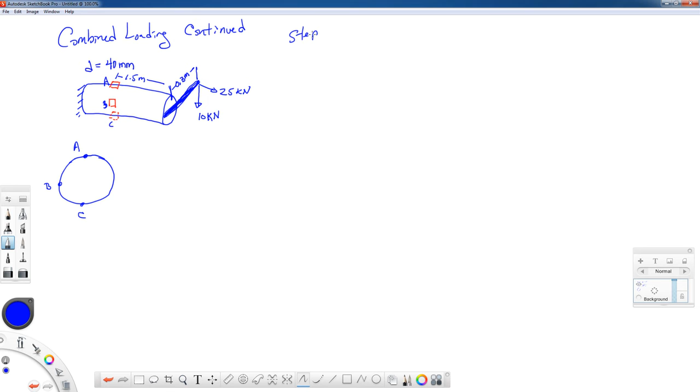So although we could make a free body cut at point A and find the reactions directly, what I would suggest, if you have anything like an overhanging arm or the geometry looks a little bit complicated, is to simplify that first. And what we need to do is to resolve those forces to the centroid of the cross section of the bar that we're looking at.

So in this particular problem, let me redraw the bar that we've got. I think I can do a little bit better job than that. Let me try that again.

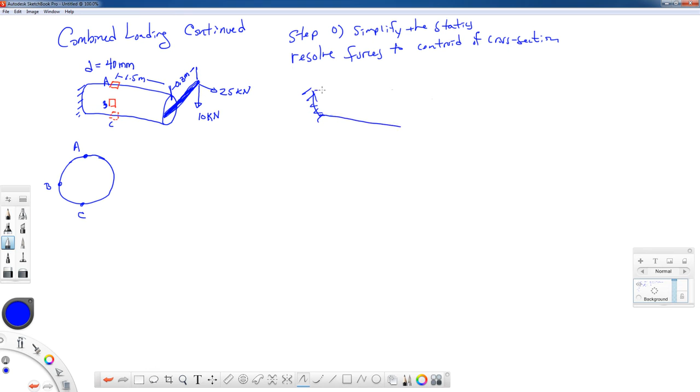We have this 25 kilonewton load at 0.3 meters from the centroid. So this is trying to show that this is located at the centroid. So we're going to replace that force with an equivalent force and moment. Now the force will be in the axial direction at the centroid, and it's still 25 kilonewtons. But we're also going to have a bending moment that goes on the front of this bar, kind of from left to right. And that bending moment, I'll call that M1, is going to be 25 kilonewtons times 0.3 meters.

Now we have to deal with the 10 kilonewton force. It will also come over as a force and a moment. Anytime you move a force, it moves as a force and a moment. In this case, it moves as a torque, which is a special kind of moment, if you want to think of it that way. And the torque in the front will come around this way. So I will call that torque T. See, it's pulling down this way. It's going to cause a torque that goes that way. And that torque T will be 10 kilonewtons times the 0.3 meters.

So that first step is always to simplify the problem. And now this looks a lot like the other kinds of problems that we've worked in the past. All right, let's now take a cut at our points of interest, which are 1.5 meters from the free end.

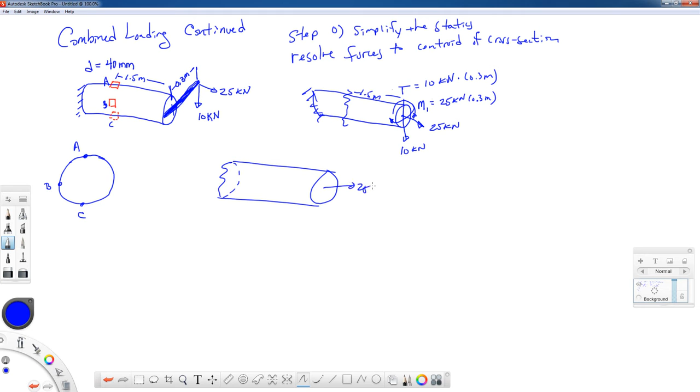We have an axial force going out of 25 kilonewtons. We have an axial force that goes this way, 25 kilonewtons, to keep that at equilibrium. We have a torque that comes around this way in the front. I'll call that T. We know the value of it. So we have to have an equal and opposite torque, T, on the backside. We have a bending moment that goes left to right. That's my M1. We have to have an equal and opposite bending moment that goes that way. That's my M1. We have a 10 kilonewton force that comes down. We have to have a 10 kilonewton force that goes up.

And in addition to that 10 kilonewtons, as we move further down to get to 1.5 meters, we're also going to have another bending moment that puts the top in tension and the bottom in compression. So it's going to go top to bottom, and I'll call that M2. Now sometimes these things can be kind of hard to draw and visualize. It takes a little practice, and be careful as you look at my picture. It might be a little bit confusing too, but try to see where these moments are coming from. So that M2 would be 10 kilonewtons times the 1.5 meters.

Alright, so we have 3 points. Let's just do them all at once. Here's the top view of A, here's the side view of B, and here would be looking through the section like a top view of C. Alright, so we're going to go through each of these reactions and see how they cause stress at those particular points.

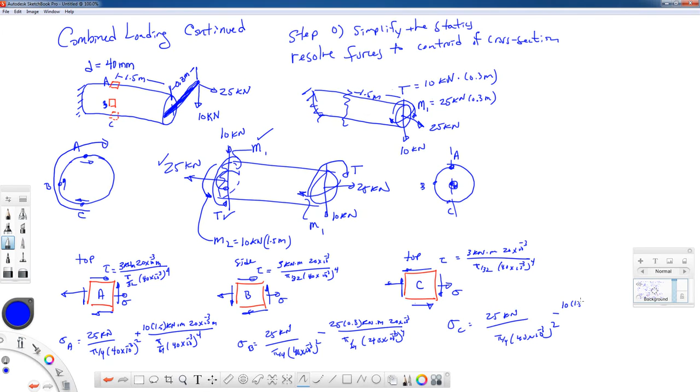Now point C has the exact same stress, except it's in compression from the bending moment. So now at point C, we're going to subtract away that bending stress term. 10 times 1.5 kilonewton meters, times 20 times 10 to the minus 3 for the radius, the diameter over 2, divided by the bending moment of inertia, pi over 64, diameter to the 4th power. So that takes care of M2.

And the last thing that we want to look at then is the transverse shearing force. It goes down in the front. Let's draw another cross section. The formula for that is VQ over IT, where Q is the first moment of area that we're going to shade in from the point of interest to either the top or the bottom of the cross section.

And at point A we have no Q area, and at point C we have no Q area. So we don't get any shearing stress at points A or C from the 10 kilonewton force. We will get some shearing stress at B. The area that we shade in will be the top half. That shearing stress goes down on the right side of point B, so I'm going to subtract off, and I'm going to write this here as VQ over IT, and let's go over here to fill that in with the numbers.

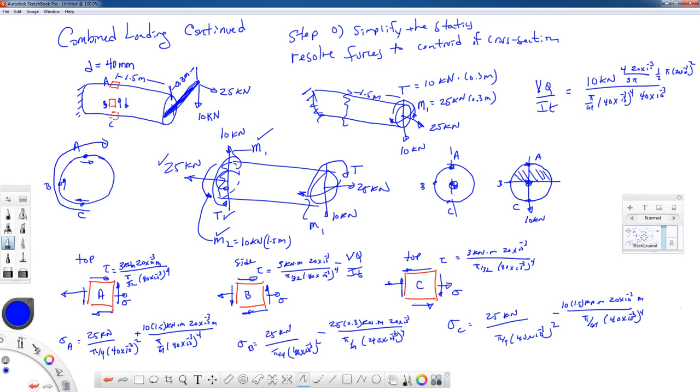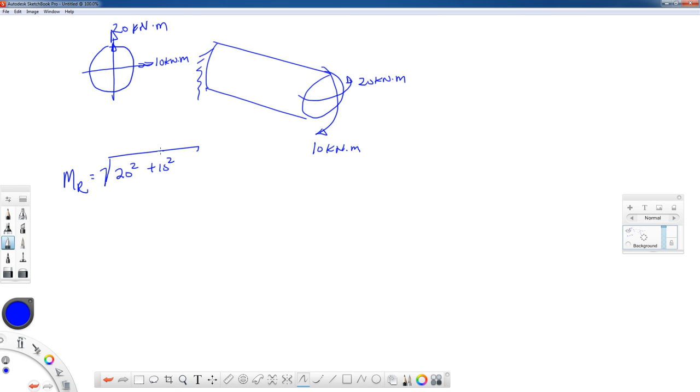The other one, 10 kilonewton meters, bends top to bottom. Using the right-hand rule, I can figure out which direction that double-headed arrow points. That would be a double-headed arrow that would point to the right. Now, if I wanted the resultant moment, that would be the square root of the sum of the squares. Let's see what we get for that. That'd be 22.4 kilonewton meters.

If we wanted to find out where on the cross section had the most tension or compression, we can construct a vector diagram, where this is 10 kilonewton meters here. Let's move it over here just a little bit. And we can call this angle theta. So the tangent of theta would be equal to 20 over 10. Let's see what that would be. 63.4 degrees.

So on the cross section, at an angle of 63.4 degrees would be either my maximum tension or my maximum compression, and 180 degrees from that would be the opposite, maximum compression or maximum tension. Now we can figure out which one is which by looking at these diagrams. So let's see. Something looks a little bit off to me on this one, because I would suspect that the maximum compression should be down here somewhere.

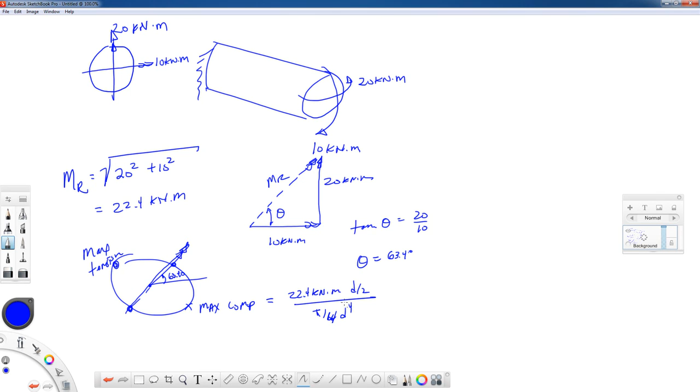Well, this will be the resultant, so that's true. So the resultant moment would go this way, and if we use our right-hand rule, the maximum compression would be here, and then over here would be the maximum tension. Okay. So the math is right. You just have to be careful about how you interpret that double-headed arrow. All right, so then if we wanted to find the stress here, that would be equal to M, the resultant moment, times y, the diameter over 2, divided by the moment of inertia, pi over 64 times diameter to the 4th power.

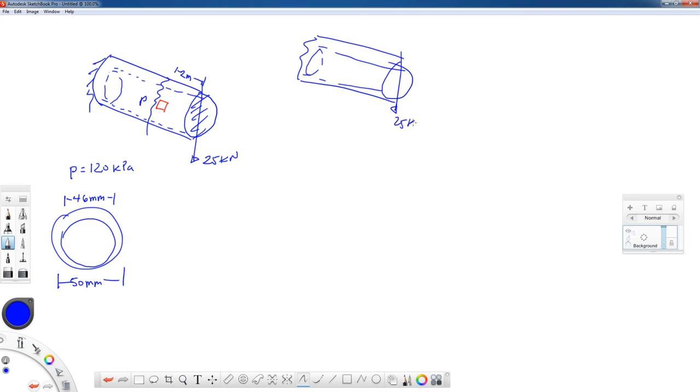Alright, so let's do another example. Here's a cantilevered pressure vessel. It's got a force on the end of it. We'll do the same things that we need to do. We're going to cut this at our point of interest. Draw our free body diagram. If we have 25 kilonewtons coming down, we have to have 25 kilonewtons coming up. And we're going to have a bending moment equal to 25 kilonewtons times 2 meters. Our point A is on the side of our bar right here. And we want to see how these reactions contribute to the stress at point A.

First of all, we'll have our pressure vessel stresses. The axial stress is the smaller of the two pressure vessel stresses. It's equal to the internal pressure times the inside radius divided by 2 times the wall thickness. Now let's see. The total difference would be 4 millimeters, so the wall thickness would be 2 millimeters. And the hoop stress goes around the circumference. That would be the larger of the two, PR over T. Again, we need to use the inside radius, and then the thickness would be 2 times 10 to the minus 3 again.

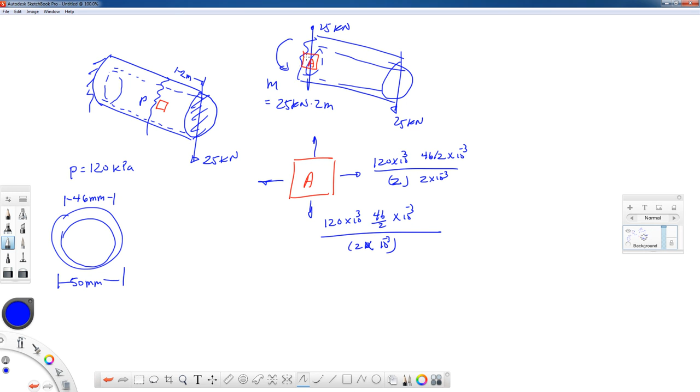We're going to have a bending moment. It puts the top in tension and the bottom in compression. It does not affect point A. So we're done with that one. We will have a transverse shearing stress. Let's draw the cross section over here.

Here's my point A. What I'm going to do is I'm going to shade in from my point of interest to the top of the cross section. And here we have this thin ring. What we need to do is we need to find Q for that thin ring. We're going to apply the formula tau is equal to VQ over IT.

That shearing stress will go down on the right side because the force goes down on the right side. These other arrows get penciled in for equilibrium. Let's call this one sigma x. We'll call this one sigma y. And the shearing stress tau xy will be equal to the VQ over IT term. Let's fill in some of these terms. So V is going to be 25 kilonewtons. We'll talk about Q in a moment.

I is going to be pi over 64 times outside diameter to the 4th power minus the inside diameter to the 4th power, divided by the thickness of the cross section. Now, the thickness of the cross section is going to be this dimension plus this dimension. The thickness, the T in VQ over IT, is a different T than in the pressure vessel T. It's the total thickness of the cross section.

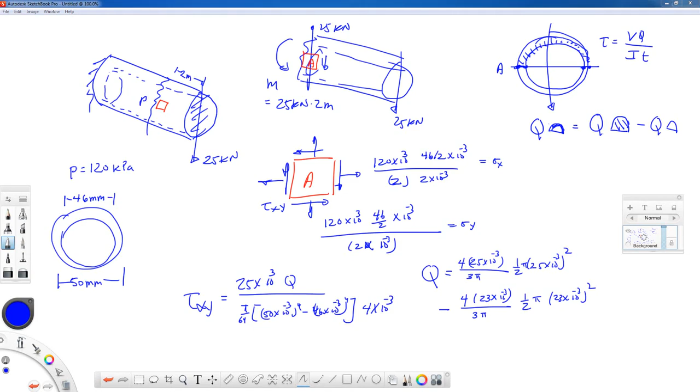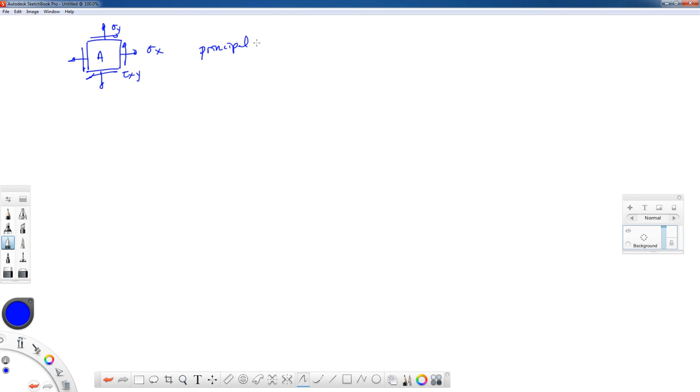So I'm leaving this as symbols, but suppose we've calculated sigma x, sigma y, and tau xy for our problem. If we want to find the principal stresses, we can use Mohr's circle. We can go through our whole process where we plot sigma and positive tau. We got maybe our sigma x and our tau xy point right here. That'd be our x point. Maybe this point is our y point, which would be sigma y comma minus tau xy. We draw our circle. We find our radius. And sigma p1 and 2 would be equal to the average plus and minus the radius.

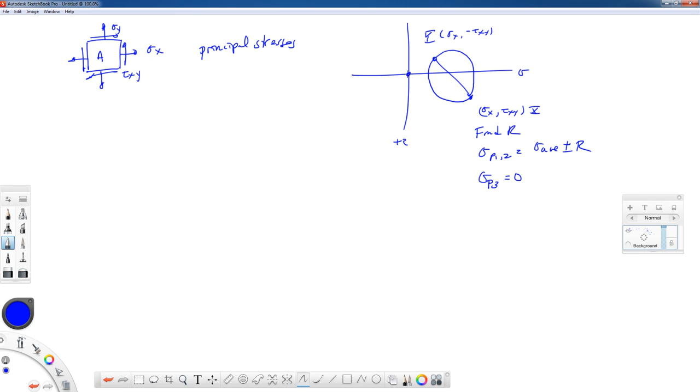Now, in the previous problem, we had a pressure vessel which created what's called a biaxial state of stress on the surface of our component. On the outside surface of the pressure vessel, the third principal stress would be equal to 0. On the inside of the pressure vessel, the third principal stress would be equal to the value of the pressure, but the negative of that number. Now, on the outside of the pressure vessel, the third principal stress would be 0. So this would be a case where we have an out-of-plane absolute maximum shearing stress.

So I may ask you to find principal stresses. I may ask you to find the absolute maximum shearing stress. Another thing I can ask you to do is apply a failure criterion on your final exam. We'll talk about that in a couple lectures. I can ask you to find the strains for this particular stress state. And just as a reminder, in order to find the strains, we would use Hooke's law, 3D Hooke's law.

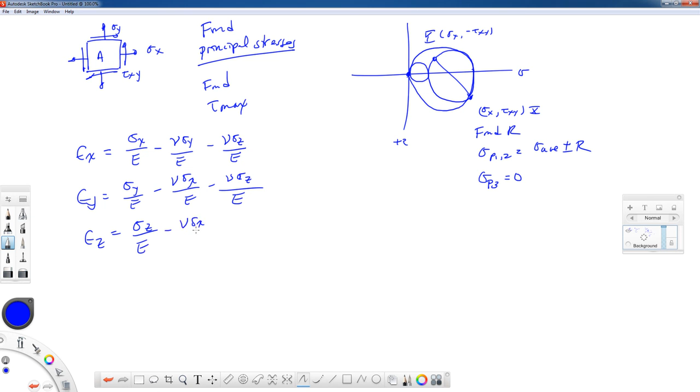So epsilon x would be sigma x over E minus nu sigma y over E minus nu sigma z over E. Epsilon y would be sigma y over E minus nu sigma x over E minus nu sigma z over E, and so forth. The shearing strains, gamma xy would be equal to tau xy divided by the shear modulus G. And if we had them, let's just go ahead and write these down. Gamma xz and gamma yz can be found by taking their respective shearing stresses and dividing by the shear modulus.

So I can ask you to find stresses in the xy coordinate system, strains in the xy coordinate system. I can ask you to find principal strains. So knowing that strain state, you can do a Mohr's circle of strain. Alternatively, if you've already found the principal stresses, you can find the principal strains by plugging the principal stresses into 3D Hooke's law.

So there's a lot of things that you can do with these combined loading type problems, and they're very good to put on a final exam because I can test you over a lot of things in one problem. Alright, so we'll make this lecture a little bit short. We might come back and fill in with some more examples later on.